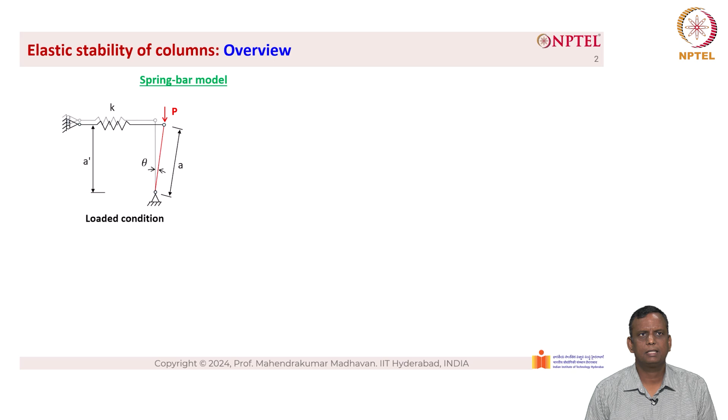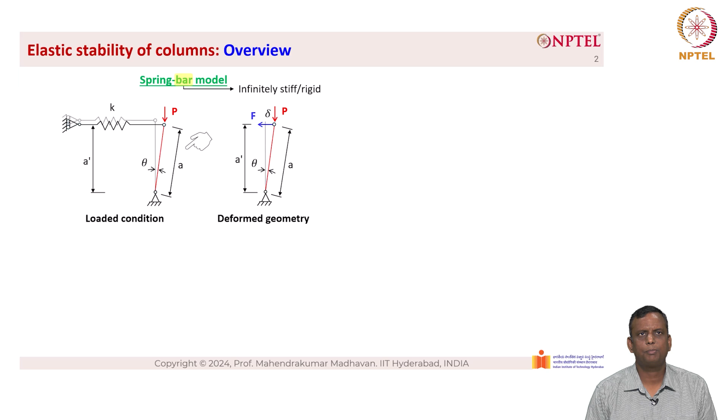We began the course by talking about the spring bar model, as you can see from the picture here. In the deformed or loaded condition, there is a small displacement, a rotation theta. The bar is assumed to be infinitely stiff or rigid, because this way you can easily solve the problems using algebraic equations rather than getting clouded with complex mathematics such as partial or ordinary differential equations.

In the deformed shape, we have a restoring force F and a disturbing force P. Using equilibrium, we find the equation P delta minus Fa dash equal to 0 - equation 1. Using the force displacement relation, F equal to K delta - equation 2. Then the strain displacement relation delta equal to A sin theta - equation 3. Solving the three equations, we get P equal to Ka cos theta.

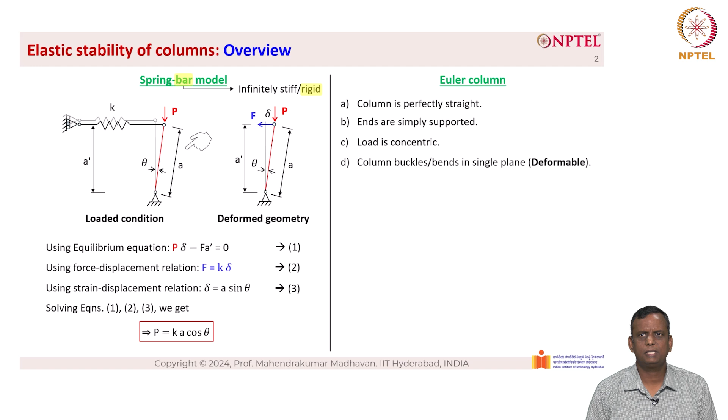When it comes to the Euler column, there are certain assumptions: the column is perfectly straight, the ends are simply supported, the load is concentric, and the column buckles or bends in a single plane, meaning it is deformable. This is very much different from the spring bar model.

The curvature is approximated to be y double dash, and the material is homogeneous and obeys Hooke's law. This is the picture of the simply supported column loaded axially. Using this, we can come up with a free body diagram at the loaded condition.

Taking moment about point B, we have M equal to P into y, which equals minus EI into d square y by dx square equal to Py. Dividing EI on both sides, we get d square y by dx square plus P by EI into y equal to 0. Let's take P by EI as k square.

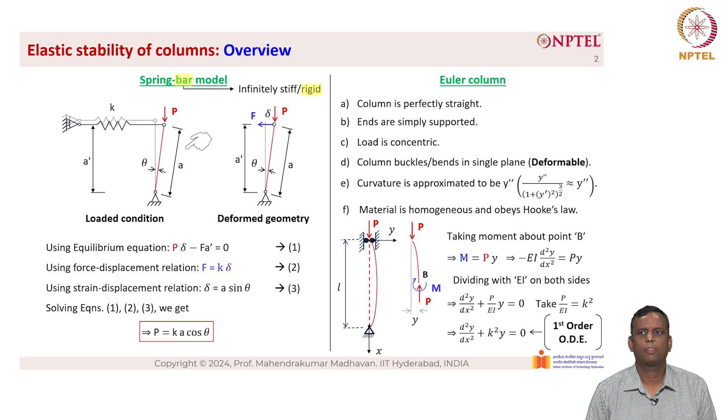We have d square y by dx square plus k square y equal to 0. This is a second order ordinary differential equation. Upon solving, we get P critical equal to pi square EI by L square.

The generic equation for Euler critical load is P critical equal to pi square EI by KL the whole square. This K is the effective length factor which takes into account the various boundary conditions for the column.

The deformed shapes of columns with different boundary conditions can be seen below. The first is for pin-ended conditions where K equals 1.0. The next is for fixed boundary conditions where K equals 0.5. The third is for pinned and fixed conditions where K equals 0.7. The next is fixed and free condition where K equals 2.0.

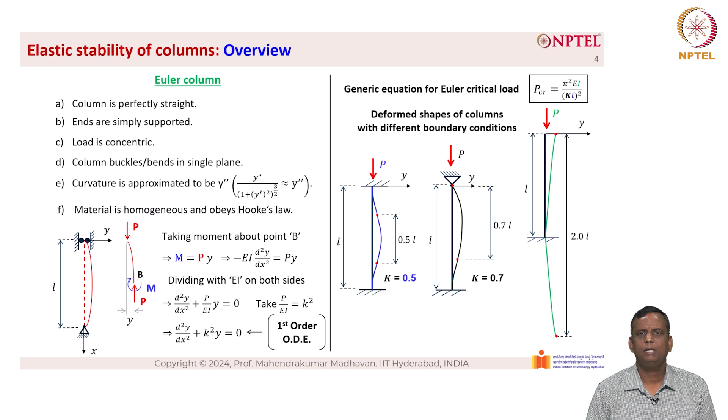This comes under the concept of the hidden Euler strut, where the Euler strut is assumed to be hiding in each of these columns. The buckling load between the points of inflection or contraflexure is basically the Euler column that is hiding.

So we have the generic equation for Euler critical load, P critical equal to pi square EI by KL the whole square. These are the four differential equations that we have solved previously in our classes, and we have got the K values as 0.5, 0.7, 1.0 and 2.0.

The takeaway here is that the applied load P is concentric compression, as you can see, and the column bends or buckles in a single plane. The governing differential equations are a function of only one variable, which is y.

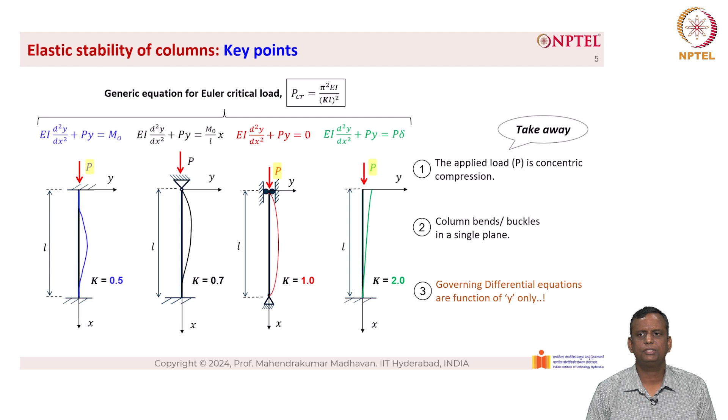Now, how is a column different from a beam? Fundamentally, columns are axially loaded members, whereas beams are transversely loaded members. Let us identify columns and beams based on these statements.

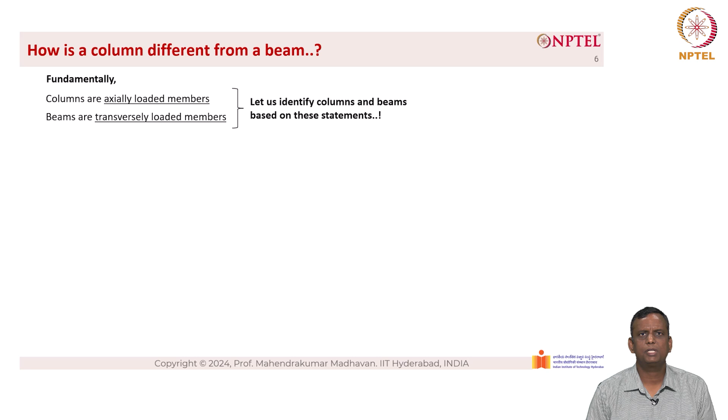In practice, columns are predominantly axially loaded members, while beams are predominantly transversely loaded members. Mathematically, when P is very much greater than M, it behaves like a column. When P is very much less than M, it behaves like a beam. And when P is more or less equal to M, it behaves more like a beam column.

In the previous classes, we have studied columns. So let us understand the behavior of beams in this course.

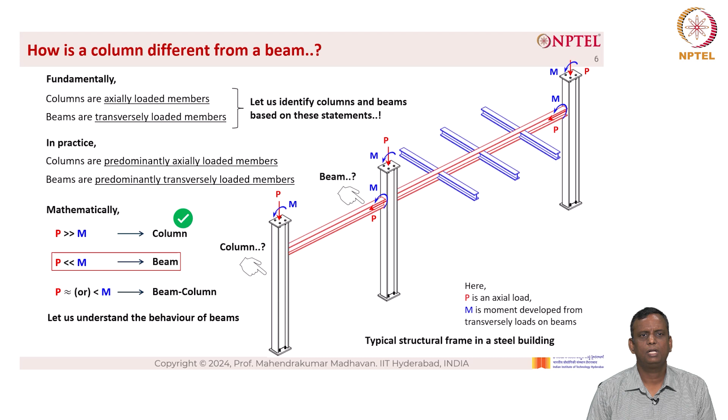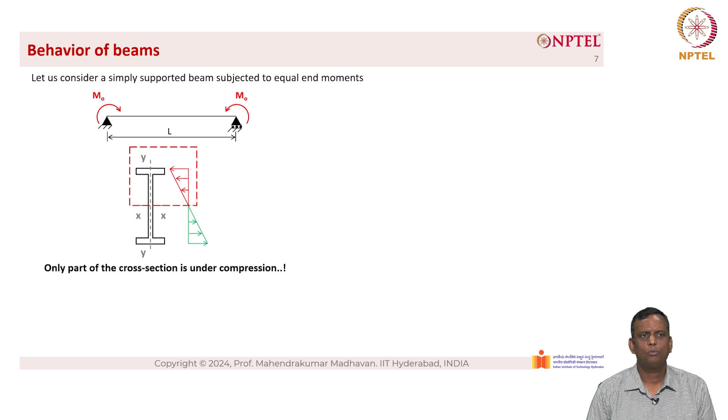Let us consider a simply supported beam subjected to equal end moments, as shown in the picture. At the cross section, the top half of the member is subjected to a linearly varying compressive load, whereas the bottom half is subjected to a linearly varying tensile load. Here, only one part of the cross section is in compression, whereas in a column, if you cut across it, the cross section is subjected to uniform compression, as shown in the figure.

So generally, when a transversely loaded member is bent about its major axis, it may buckle sideways, also known as lateral buckling, if its compression flange is not laterally supported.

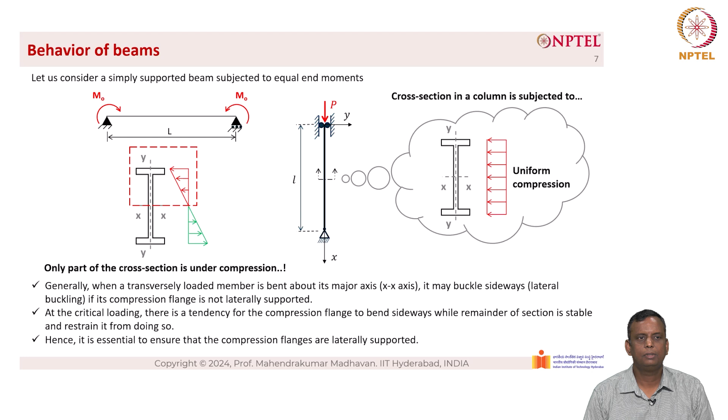And the critical loading - what is critical loading? When the applied load is equal to P critical, there is a tendency for the compression flange to bend sideways while the remainder of the section is stable and restrains it from doing so. Hence, it is essential to ensure that the compression flanges are laterally supported.

So, depending on whether the compression flange is laterally supported or not, beams can be categorized into two types. The first is laterally supported beams. A beam is referred to as laterally supported or laterally restrained when lateral buckling is prevented by providing adequate restraints to its compression flange along the length of the beam.

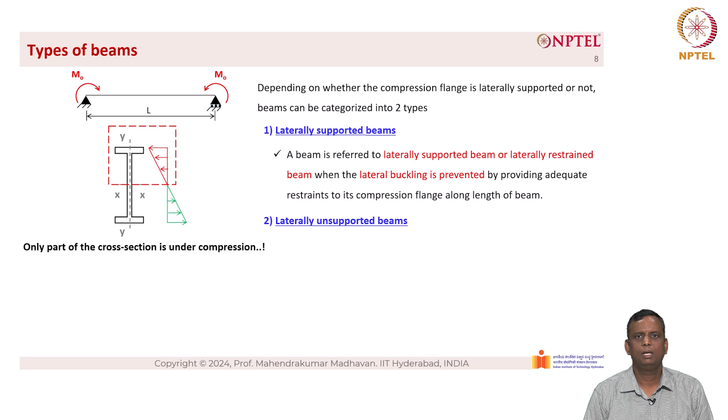Laterally unsupported beams is the second category. A beam is referred to as laterally unsupported or laterally unrestrained when lateral buckling is not prevented. If the laterally unrestrained length of the compression flange is relatively long, then a phenomenon known as lateral buckling or lateral torsional buckling, also known as LTB, may take place.

So mathematically, in terms of flexural stiffness, the laterally unsupported beams satisfy EIx/L much greater than EIy/L, which means the flexural rigidity of the beam in the major axis is much greater than the flexural rigidity in the minor axis. Here EI refers to flexural rigidity, E is the modulus of elasticity, Ix is the moment of inertia about the x-axis (strong axis), and Iy is the moment of inertia about the y-axis (weak axis).

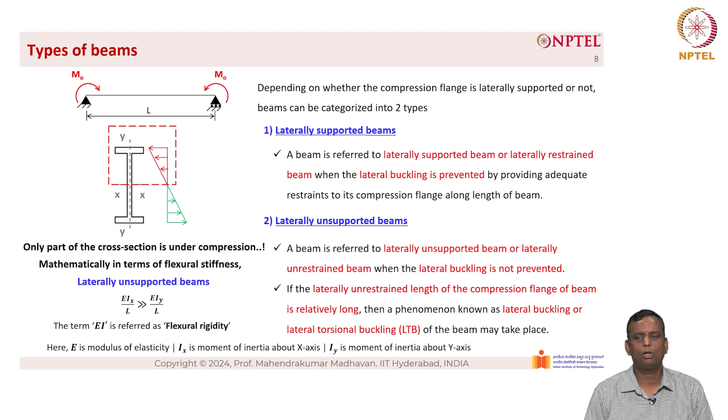So let's look at laterally supported beams. In laterally supported beams, the movement of the beam is only in one direction, which is vertical in nature. So it can be solved by mechanics of solids.

From simple bending theory, we have M/I equal to sigma/y equal to E/R. So we know that M equal to I/y into sigma, the stress acting in the extreme fiber. This I/y can be replaced with Ze, which is also known as section modulus or elastic section modulus in this case.

Assuming the extreme fiber reaches the yield stress Fy, which means it is governed by strength, we have M equal to Fy into Ze. We multiply and divide by Zp, the plastic section modulus, giving M equal to (Ze/Zp) into Zp into Fy. So we have M equal to beta-B into Zp into Fy.

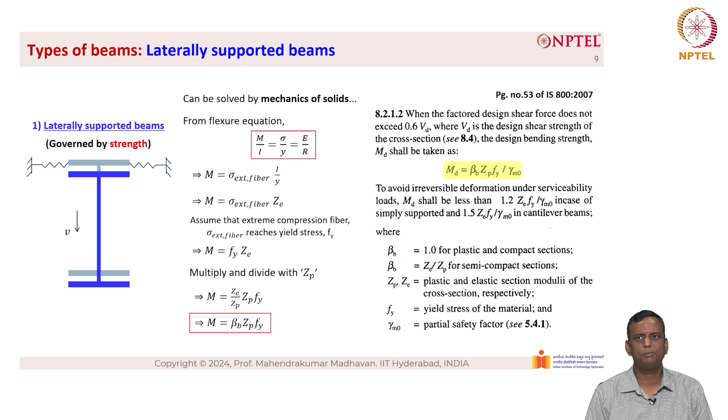This is very similar to the equation given on page 53 of IS 800, as you can see from the right hand side. The only difference is Fy is replaced with Fy divided by gamma-m-naught to account for the partial safety factor. Now let's come to laterally unsupported beams.

In laterally unsupported beams, the member is not only subjected to vertical movement, but it is also subjected to lateral movement and it will also twist. How does it twist or move laterally? Basically, when a small amount of force is applied, it moves vertically. Then as you keep increasing the load, there is a tendency for the beam to either spend more energy going down or take the easy route by twisting sideways.

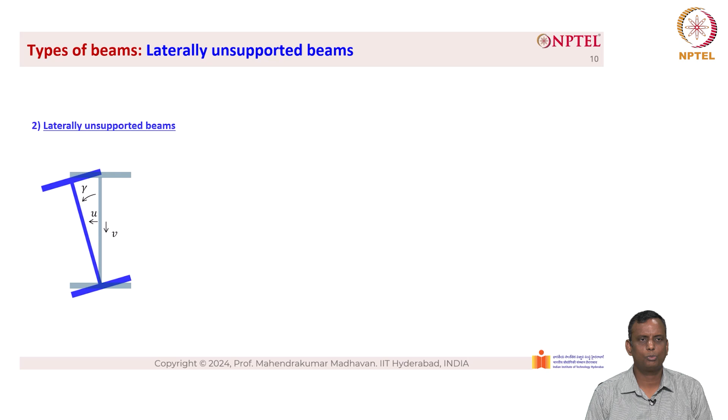Since the flexural rigidity of the beam in the minor axis is much lesser than the major axis, it will tend to slightly bow outside, in the U direction. And since the top half is in compression and the bottom half is in tension, only the compression flange will have a buckling effect, so it will tend to twist as well, whereas the bottom half will be trying to restrain it.

So this cannot be solved by mechanics of solids. Why? Because from the flexure equation, M equal to beta-B into Zp into Fy, here the beam does not reach Fy, and hence the mechanics of solids equations cannot be applied here.

So laterally unsupported beams are governed by what is known as stability. The elastic lateral torsional buckling moment M critical is given as M critical equal to beta-B into F critical B into Zp, where F critical is the critical buckling stress in bending.

So the beam undergoes three deformations: U, V and gamma. The differential equation is a function of lateral displacement U, vertical displacement V, and the twist gamma. The lateral and vertical displacements can be obtained using the Euler column equation: EI into d²y/dx² plus Py equal to 0. Here the first part is the internal resisting moment M, and M sub E is the external applied moment.

The displacement in a single plane y can be replaced with either u or v, so the external moment M sub E can be replaced with the component of external moment, in this case m-naught. So for lateral displacement, the equation becomes EI into d²u/dx² plus my equal to 0. And for vertical displacement, we have EI into d²v/dx² plus mx equal to 0.

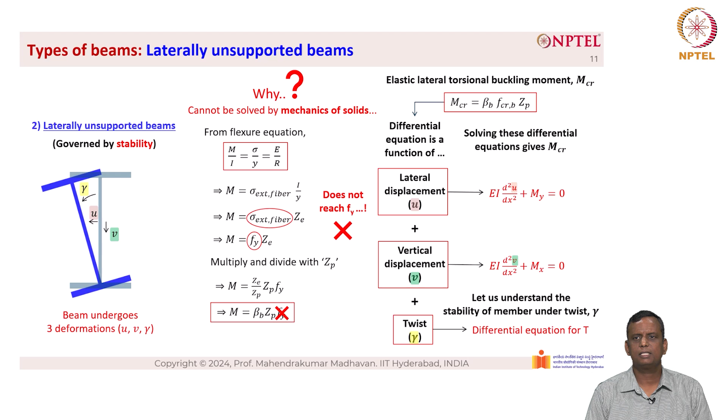Then for twist, we have to come up with another differential equation for T. Solving these differential equations gives M critical. Let us understand the stability of a member under twist gamma in the next class. Thank you.